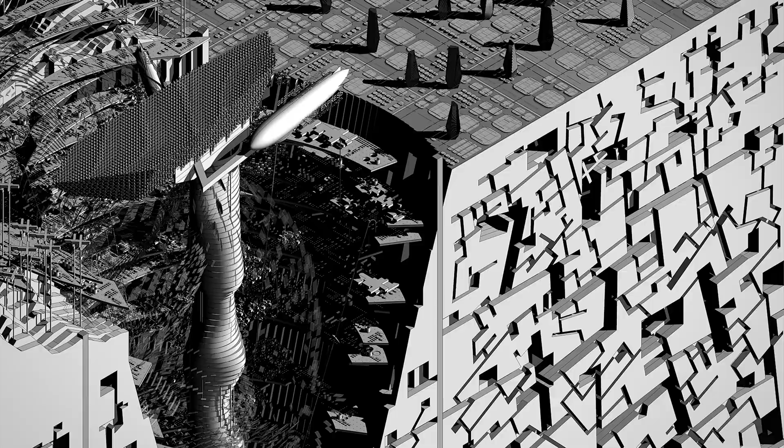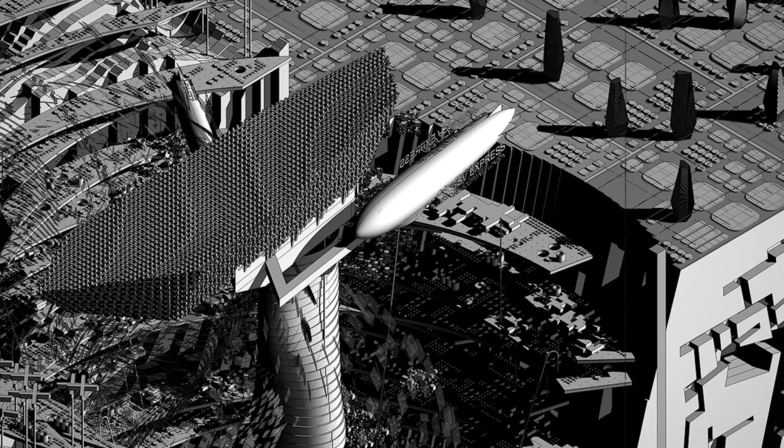Betwixt port project was developed in dialogue with many speculations. The starting point is Nuclear's Chthonipolis, a speculative design project with a post-scarcity, post-singularity city that combines architecture and science fiction to consider how AI-controlled infrastructure would dominate human society and lead it into a utopia city.

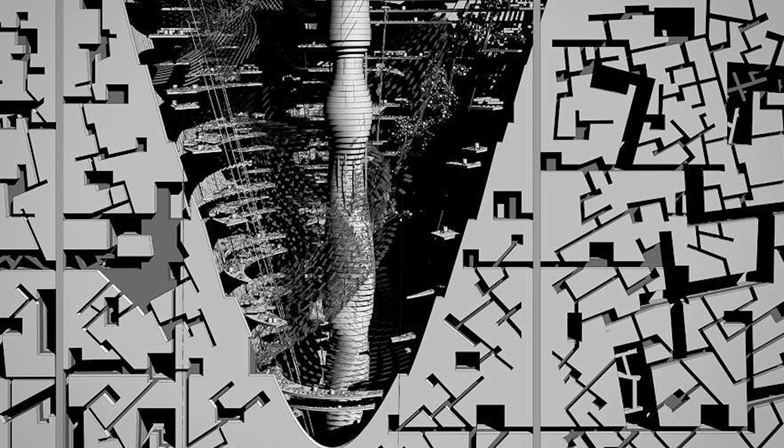A city that functions as a vast, complex network underground, with a blend of nano-bio-info-cogno facilities and human society, controlled by AI, thus utilizing AI's rationality and centralized management in order to release people to live a life of homo ludens.

The project tries to avoid the conflict between the collective automation of resources and the undesirability of fully representing collective self-expression. So, to an extent, it is a high-tech support version of Constant's New Babylon, which also brought me to consider other visionary urban projects that separate the human program layers.

If the conflict between the human way of life and the mechanical facilities controlled by AI is inevitable, then my project should directly focus on it, accepting it as a context.

To have a better understanding of how architects envisioned the relationship between human worlds and infrastructural ones, I looked at further utopia and dystopia projects, questioning options such as layered and stratified systems, metabolism regrowth projects, machine-controlled dystopian worlds, as well as levitating cosmic cities.

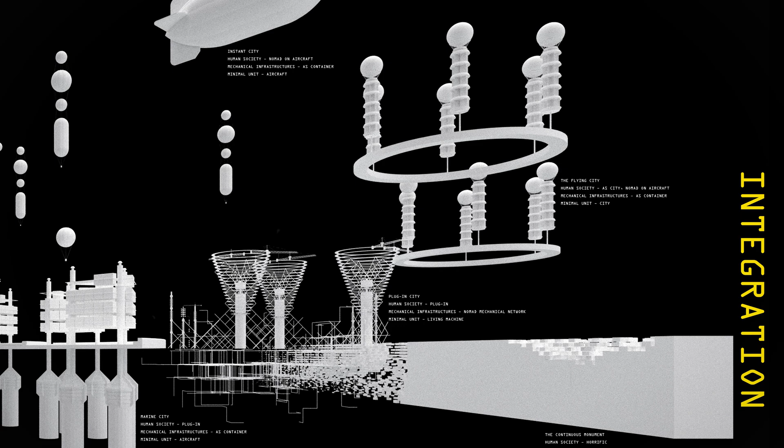The conflicts between mechanical society and human society still existed and were avoided to discuss in these projects. Yet to realize these fantasies in an integrated urban model only creates ever larger megastructures that are internally conflicted and contradictory. Thus, segregating machine logic-driven facilities from human society is inevitable, as many theorists such as Liam Young have already alerted us.

Therefore, the next phase of my research shifted from human-centered to machine-centered design, and the changes to the logic of the program and organization of the key typologies.

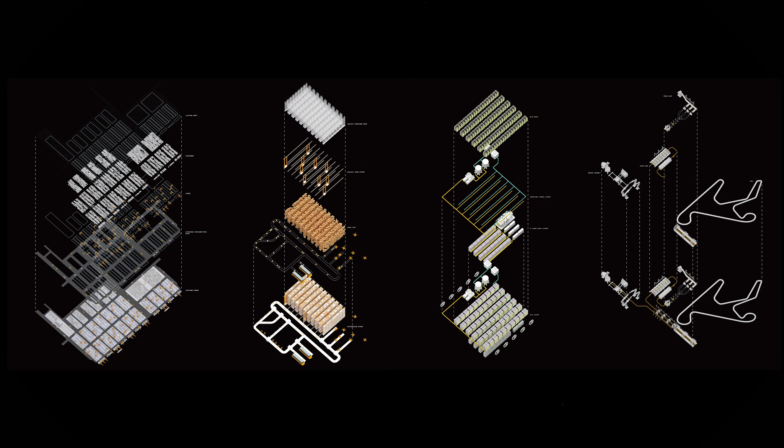So, I have explored and created these idealized design models based on the key typologies of infrastructural spaces. I focused on container port terminals, distribution centers, data centers, and automated factories to expose their key diagrams and principles of operation, to consider the next phase of automation and integration into the megaport in their development.

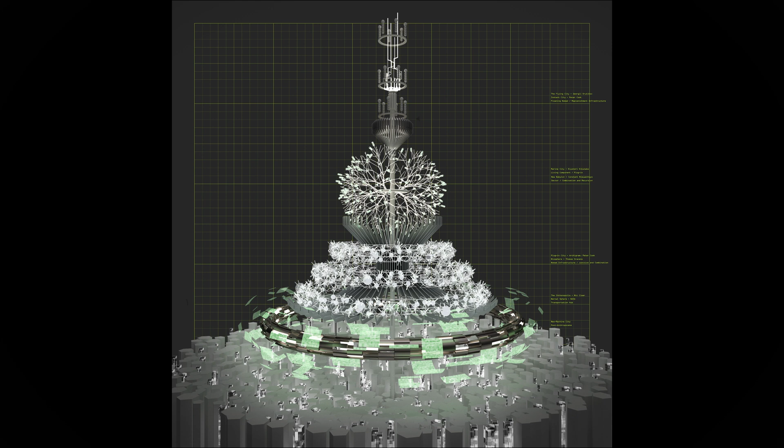At this stage, I determined that the project aims to balance and create a system that connects the human urban hubs to the AI-controlled facilities, and the growing global ports will be a good design base.

Modern ports are integrating multiple automated facilities, while remaining some historical connections to older ports and industrial zones, and indexing their own evolution. To balance speculative thinking with the research of real sites, I analyzed and compared several existing major ports worldwide. I chose two indicative pairs of ports that connect old and new facilities, in both European and Asian settings.

The first port discussed is Waigaoqiao Port in Shanghai, known as an industrial material port, with limited upgrade potential due to its connection with local industries and the city's desire for a natural zone.

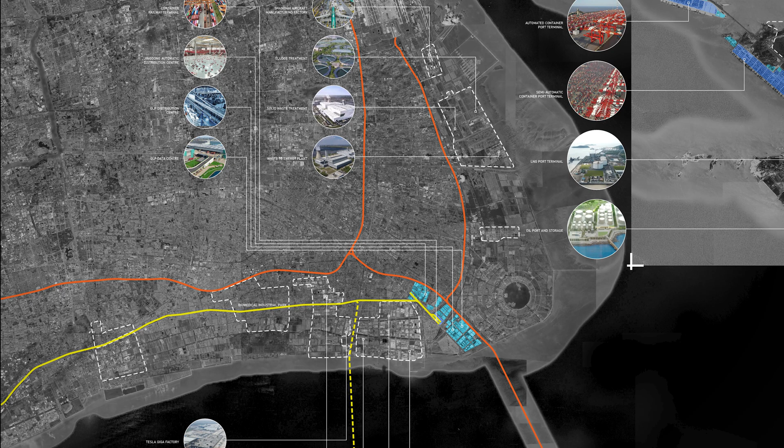The focus then shifts to Yangshan Port, an artificial seaport serving as a manufacturing cluster port and attracting modern infrastructure to support the regional manufacturing industry.

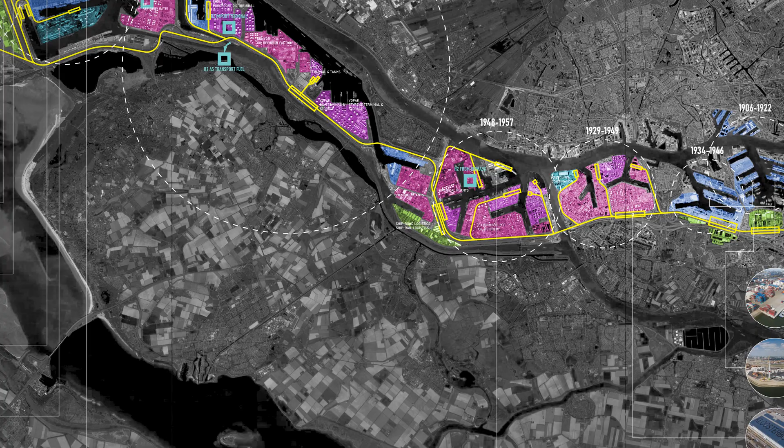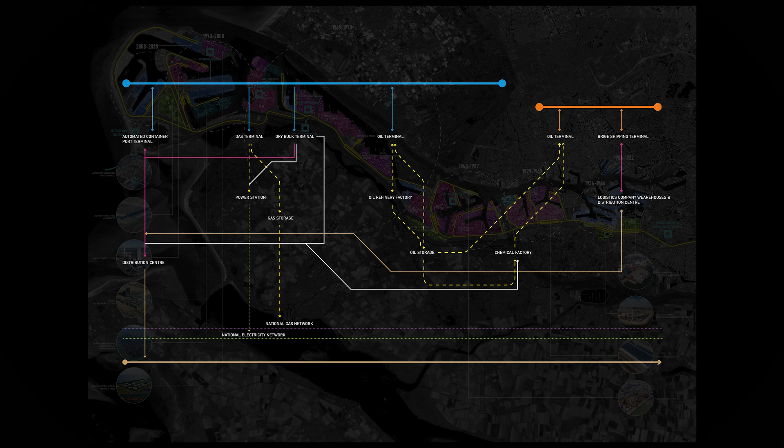Rotterdam Port, categorized as a gateway or transshipment port, plays a vital role in cargo transshipment between Europe and the rest of the world. The research diagrams emphasize cargo flow and collaboration among facilities, highlighting the contrasting connections between older local exchange zones and newer global routes and automated sectors on reclaimed coastal land.